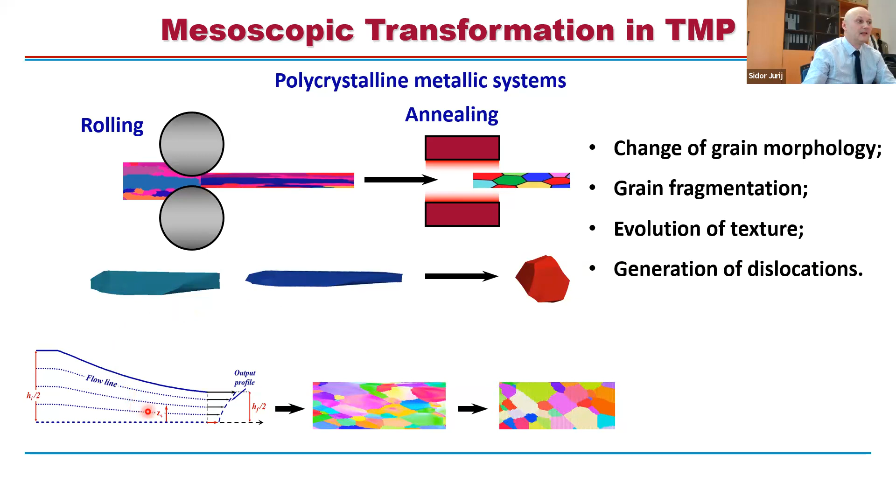Apart from this, you have the evolution of crystallographic texture. So it's not a coincidence that I put different colors here on these grains. These colors might represent various crystallographic orientations. And during the deformation process, you have generation of dislocations. You can study all these deformation phenomena experimentally, and also by employing various numerical techniques.

So in order to understand the evolution of the microstructure during the deformation, first of all, we have to understand the flow of the material. Very often we refer to well-established techniques such as the finite element model. It's based on continuum mechanics, and then we have a continuum which deforms, which moves. For instance, we can assume that here is a rolling gap, right?

Okay, so in rolling, what happens in the rolling gap? We reduce the thickness of our initial material and we build up strain inside the material. Apart from this, you have strain path change during the whole deformation process because it's not homogeneous at all. Then strain heterogeneity across the thickness due to shear. The surface layer is subjected to shear, so you will have shear but also normal components. Therefore, the strain distribution will be very

heterogeneous across the thickness. Also, roll gap geometry plays a very important role. We can take into account friction conditions during the modeling and self-evidently the properties of our material. One single drawback of finite element modeling is the model setup and calculation time. They are time consuming. Setting up the model depends on your skill and the type of model used, but it might take 3-4 hours up to half a day or even more. And the calculation time depends on the precision you want at the end.

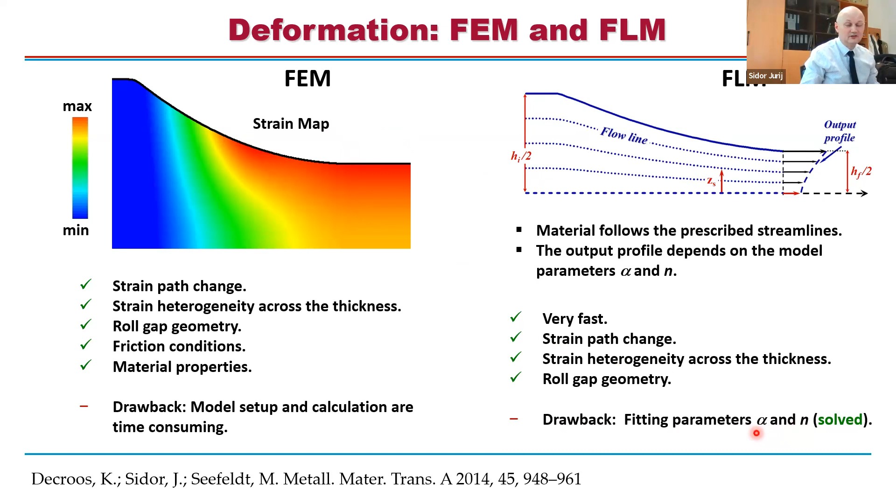In the model which we developed almost a decade ago, there are 2 fitting parameters, and with this flow line model we can almost fully reproduce the finite element results. However, there was still a question of how to interpret these 2 fitting parameters. And finally, I managed to solve this problem a couple of years ago.

In fact, it turned out that both of them are functions of the roll gap geometry. So R is the roll diameter, or radius, mu is the friction coefficient, and epsilon is the degree of the deformation. So epsilon and R are parameters of the roll gap geometry, and mu is a friction coefficient.

Here you can see the results, for instance, of the 30% deformation. If you have an initial grid, which is rectangular, so vertical lines, after the 30% deformation you have deviation from this vertical behavior due to the shear. As you can see, the same result could be nicely reproduced with the flow line model. This one takes a couple of hours, this one takes a fraction of a second, 0.2 or 0.3 seconds.

We did this exercise for many roll gap geometries, not only this one, for different thickness reductions, different roll diameters. And as you can see, we could nicely reproduce almost all finite element results. So once you have knowledge of the deformation, the amount of deformation and how it is distributed inside the material, you can move to the next stage.

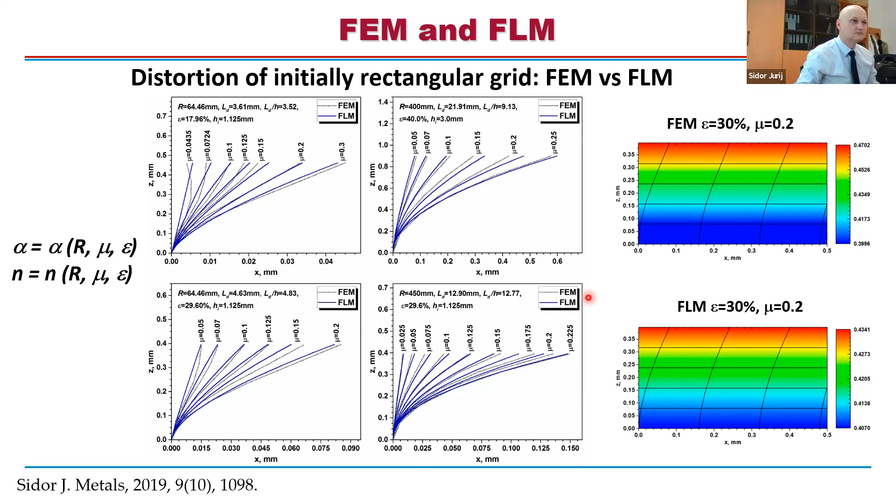The next stage is how to assess the amount of dislocations. When you deform the material, something is going on inside the material, and this something is the generation of linear defects, which we call dislocations. Here you can see the EBSD of 1050 aluminum alloy, a technically pure aluminum alloy, subjected to 50% thickness reduction, and all those features are created by the movement of dislocations. We observe deformation bands, deformation cells.

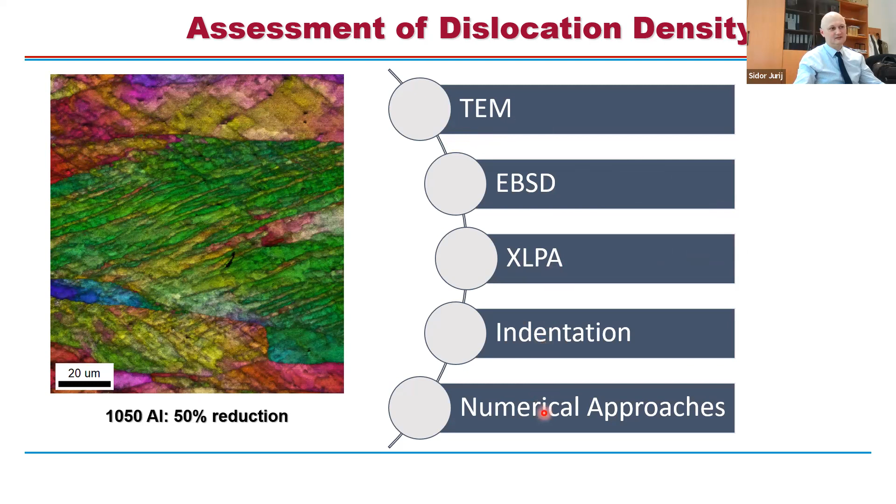Normally the evolution of dislocations is investigated by transmission electron microscopy, electron backscatter diffraction, X-ray line profile analysis, indentation techniques, or numerical approaches. TEM is quite time-consuming, and the equipment is quite complex, so very often people try to avoid it if possible. In my talk, I will concentrate on EBSD, X-ray line profile analysis, indentation, and other numerical approaches.

Regarding X-ray line profile analysis, various groups developed techniques to assess the evolution of dislocations in various materials by analyzing broadening of the line. If you observe, for instance, the 311 line, compared with the virgin material, after a certain degree of reduction this line gets broader and broader.

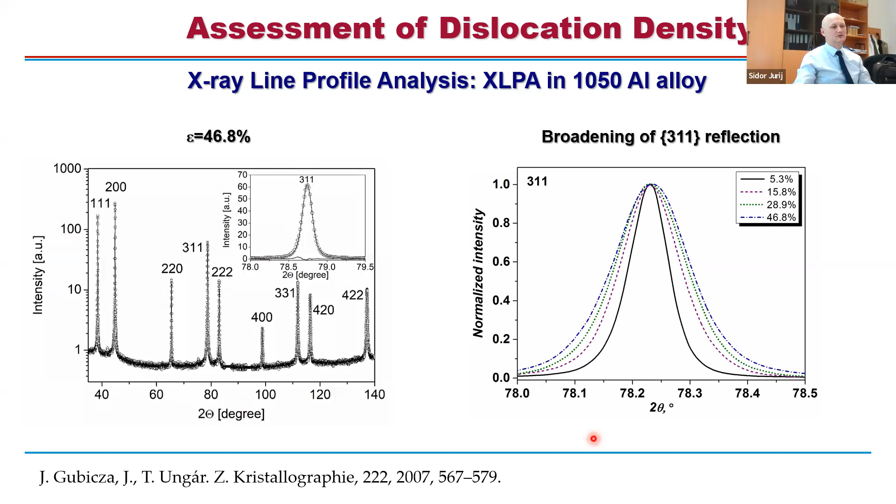The group of Tamás Ungár in Budapest, who started this assessment a long time ago, developed a method to estimate the evolution of dislocation density. You do an X-ray measurement, compare those lines with the virgin one, and based on this you can predict the amount of dislocations which have evolved. From the X-ray line profile analysis, with increasing rolling reduction the amount of dislocations tends to increase, to the power of 10 to 14. This is the range we typically expect in deformed materials subjected to 40, 50 or higher straining levels.

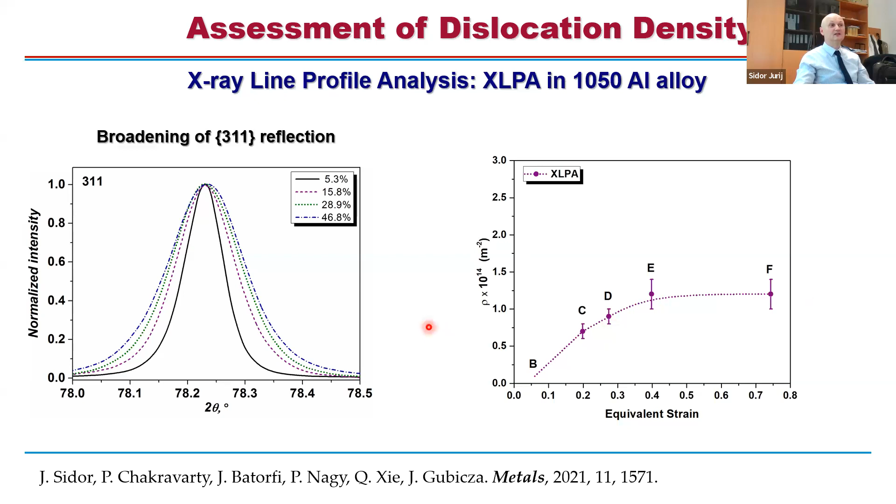Then the question is to what extent these results are reliable. We compared with the results of other researchers and have seen very comparable results. Then we said, let's try to estimate dislocation density by other techniques, and one of them is indentation. When you do micro hardness measurement, you can do it with different loads, typically from 10 gram force up to 2 kilogram force.

When you do this, you have to be aware of the so-called indentation size effect, where the hardness, in the present case Vickers hardness, is overestimated at lower loads. So when you have the information about the hardness, you always select data from the saturation zone in order to avoid this overestimation.

The group of Tony Rollett and other groups developed a technique to estimate the stored energy based on the Vickers hardness. They proposed this simple formula where you need to know the Taylor factor, G, the shear modulus, and alpha, a geometric constant. Typically people assume this geometric constant is 0.5.

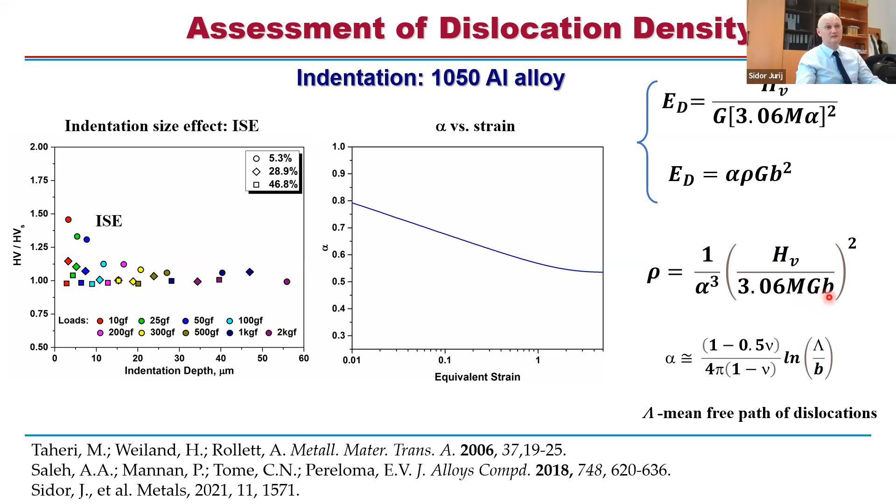Then we compare the results, what we got from the indentation technique and X-ray line profile analysis. And in fact, we were quite amazed that the trend was very, very similar. And also the order of magnitude was identical. There will be always some differences between techniques, which is evident, right?

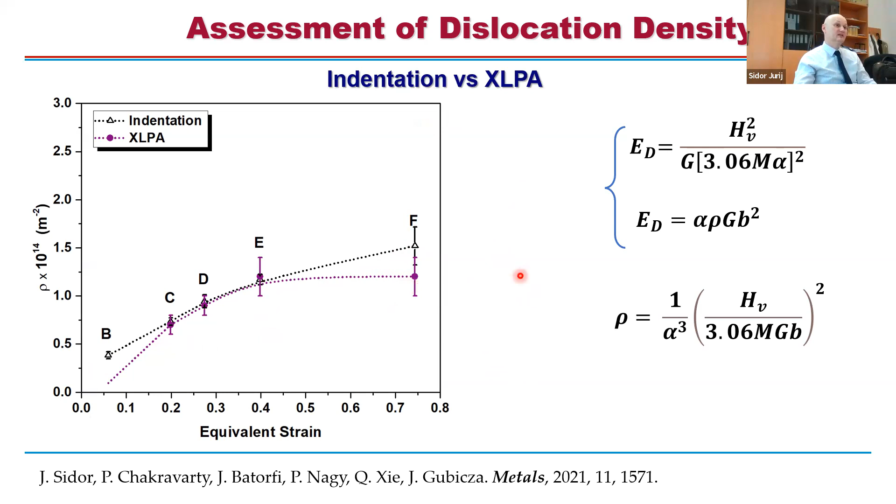So we published this work recently about the evolution of dislocations in the 1050 aluminum alloy subjected to different straining levels. And apart from this, we wanted to know whether it's possible to catch it numerically. So in fact, the total dislocation density can be modeled by the original Kubin-Estrin model or a modified version of this model, which is actually an analytical solution.

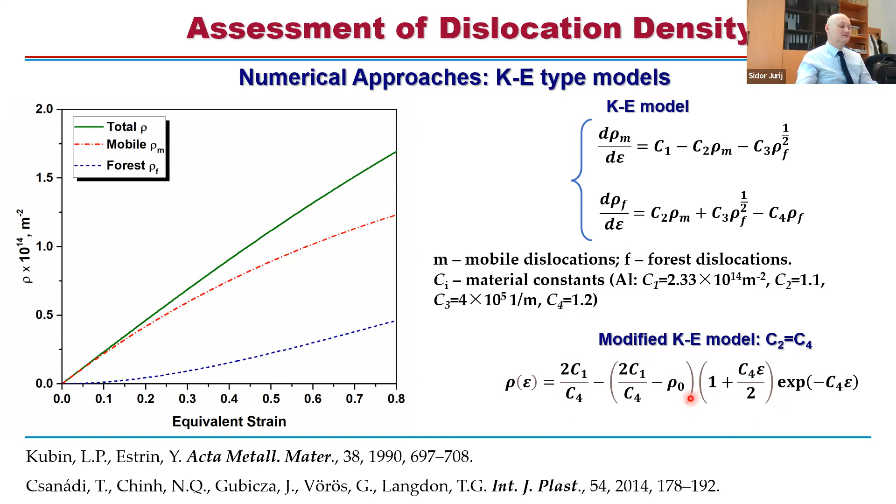In the modified model, basically what people observed is that the C2 and C4 parameters are almost identical for the majority of materials. And if you assume that they are identical, you can find an analytical solution, which you can see here. Then you can directly calculate the total dislocation density in different materials, depending on the amount of strain.

So here are the results of the modeling. The Kubin-Estrin model and modified Kubin-Estrin model are basically the same. And our experimental points, which were measured by hardness measurements, show a really very good correlation between the model and experimentally observed data. We published this result recently in Materials Characterization. So in fact, you can predict the evolution of dislocations by having information about the amount of strain which develops during the rolling.

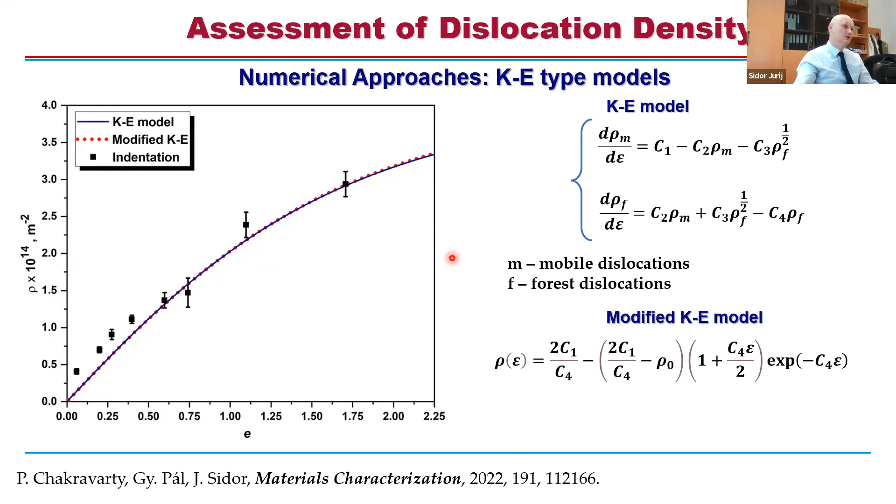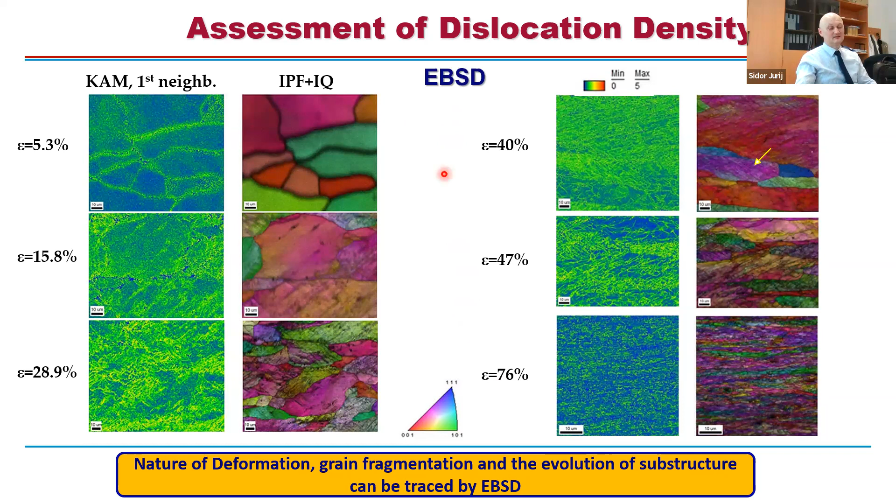When you calculate the kernel average misorientation, there is a way to calculate the amount of geometrically necessary dislocations. So you have two types of dislocations: geometrically necessary dislocations and statistically stored dislocations, like immobile ones. And GNDs are basically produced by the gradients which are observed inside particular grains, right?

When you calculate the kernel average misorientation, one thing you will immediately see is that if you perform a measurement with a certain step size, the GND you calculate will strongly depend on the step size and the neighbor you choose, first neighbor, second neighbor, and so on. So here we put the dependence of the GND on the so-called kernel radius, which is either step size or neighbor.

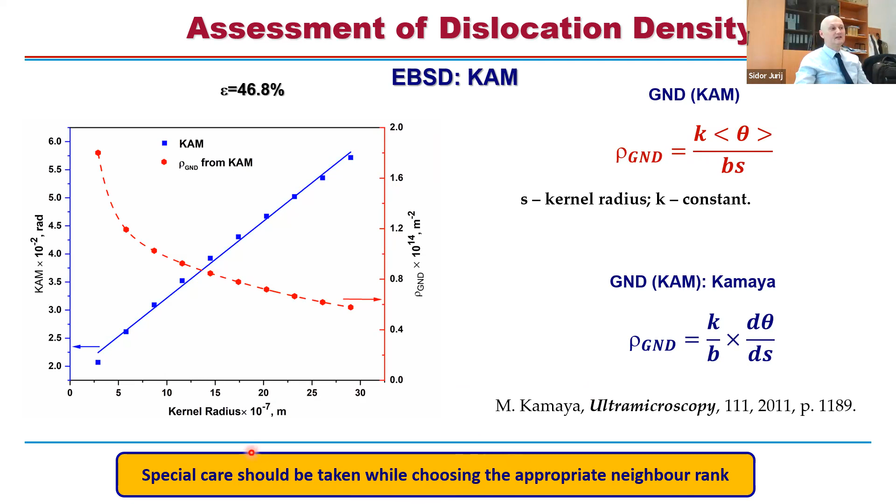In order to overcome this problem, Kamaya published a work in Ultramicroscopy, and what was shown is that instead of putting some average misorientation here, you put the slope dθ/ds, which is normally a straight line. And if you put this slope, you get a more reliable answer about the geometrically necessary dislocations. So special care should be taken while choosing the appropriate neighbor rank or kernel radius.

When you have too small step size, then you will run into another type of problem, which is called noise. So you will have overestimation of GND density. In fact, this problem was observed almost 2 decades ago and published by David Field and co-authors. What they show is that, in fact, you have overestimation or noise at very small step sizes and underestimation at large step sizes. And then the question is, what should be the appropriate step size?

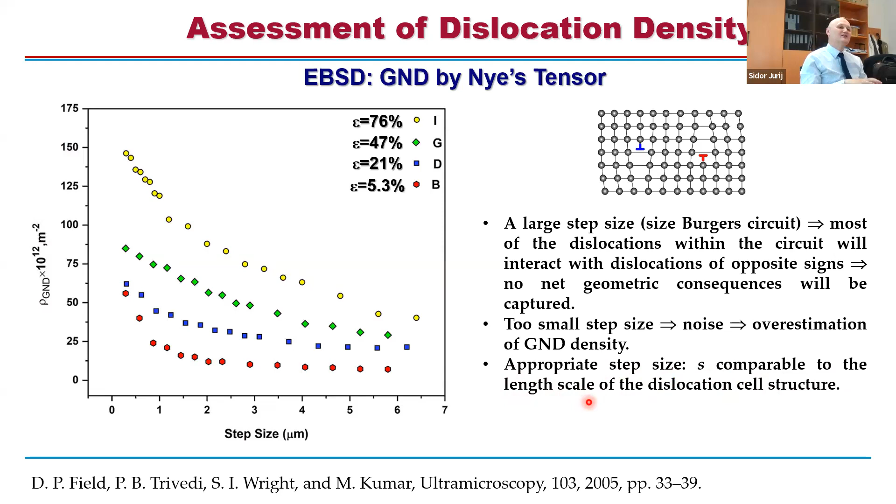So the appropriate step size should be comparable to the length scale of the dislocation cell structure, right? And then the question is, how can we estimate the size of the cell structure? When you look at what I call classical works, it's the work of Gil Sevillano and co-authors, published in 1980, where they summarize the evolution of the

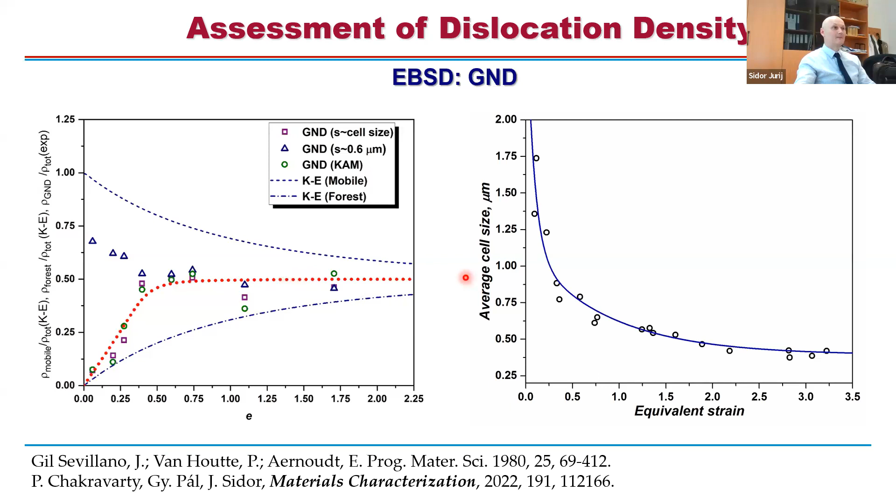And in fact, it's physically sound: the amount of GND tends to increase with the straining level. And what was very interesting to observe is that this line tends to saturate at almost 0.5, 0.48, something like that, right? So almost half of the dislocations which are generated, they are GNDs. The rest are trapped. So 50% will be trapped, and we call them statistically stored dislocations. So here you have also from the model, mobile dislocations and forest dislocations. They are, I would call, upper and lower bounds.

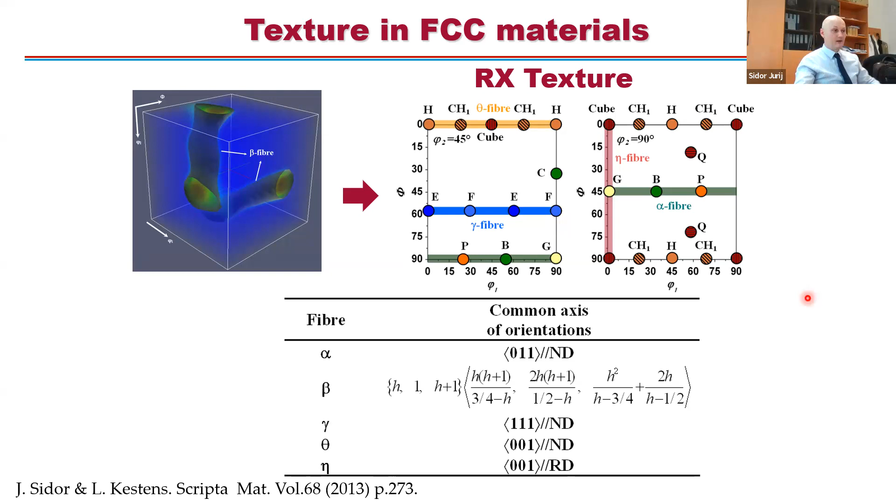Okay, then in order to understand the evolution of crystallographic texture, we developed a model which allows us to predict the evolution of crystallographic texture during recrystallization based on the deformation texture. If you remember, at the beginning I told that we should have very good knowledge about the deformed structure. So in fact, when you model the recrystallization texture, you should have very good knowledge about the deformed state.

So we take the deformation texture, then we apply growth and nucleation operators on this texture. The growth operator in our case is micro growth selection. We assign high mobility to 111 40 degree oriented grains with respect to the deformed structure, right? And then we apply so-called orientation selection or nucleation operator, which implies that you employ low stored energy nucleation. So only those nuclei with the lowest possible energy will grow. In fact, physically, it's sound because the system tries to reduce its stored energy, and only those nuclei will grow which

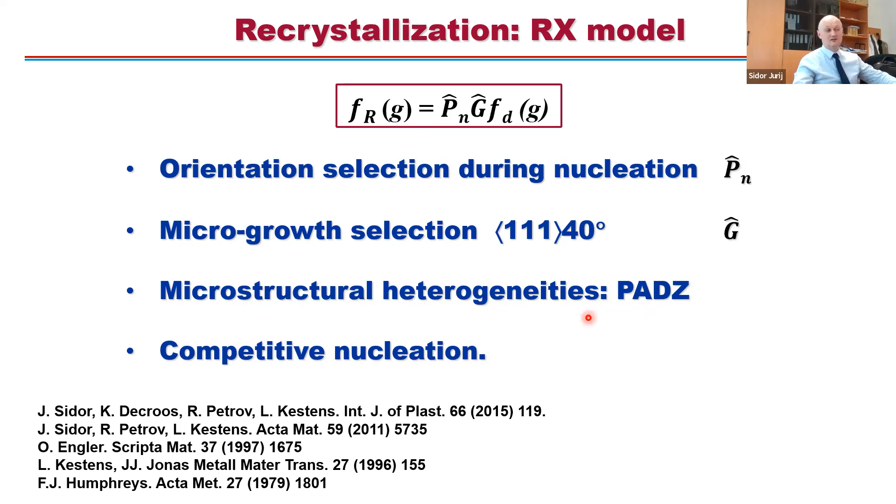have lowest possible energy. So the results of this work were published in a couple of journals, in IJP, Acta Materialia, and so on. And our model was based on the previous models, which were developed by Engler, also the work of Kestens and Jonas. And regarding particles, we took the knowledge from the group of Humphreys. So when you have particles, then you have a particle affected deformation zone, and then you have PSN, particle stimulated nucleation, which in fact competes with the bulk nucleation.

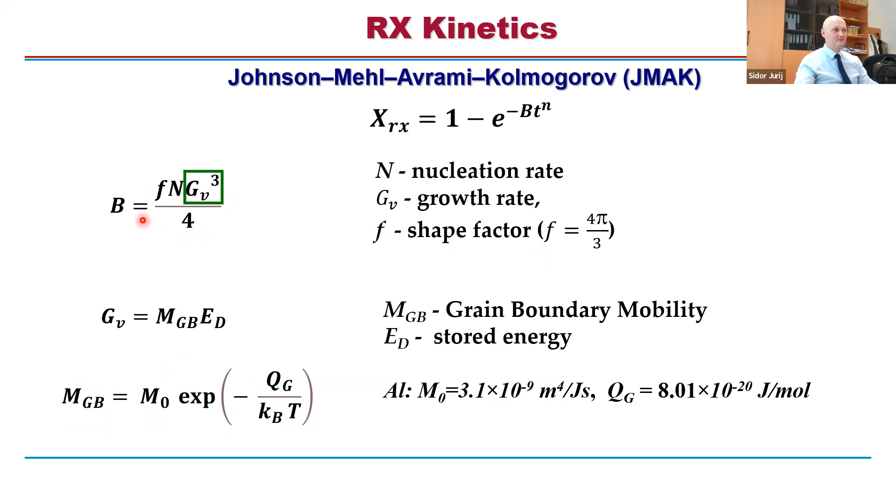Then I came back to our recrystallization model, which we developed more than a decade ago, right? So I started to analyze the outputs of our recrystallization model. So if you have a deformed matrix, assuming represented by 2000 crystals, so deformation texture, then in the model we calculate so-called growth potential texture. So we generate potential nuclei, right? So we have 8 variants; instead of 2000 crystals we will have immediately 16,000 crystals, so 8 potential nuclei per deformed grain.

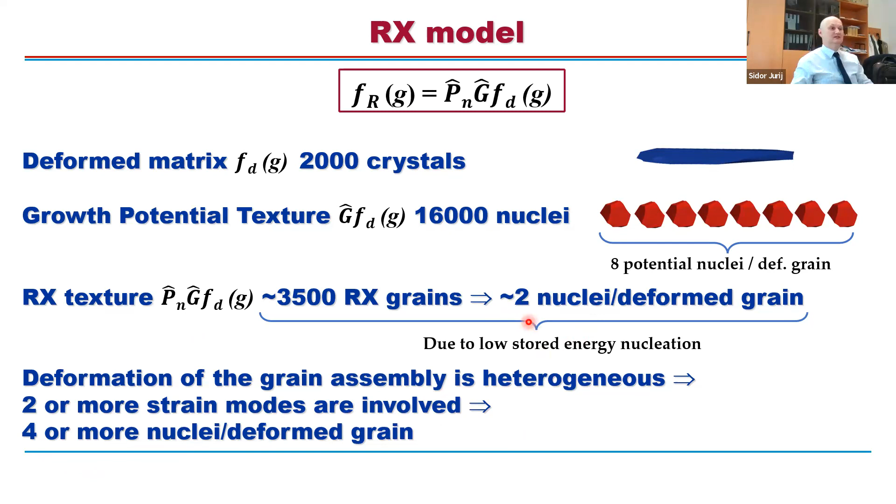However, the deformation of the grain assembly is heterogeneous, so you have not only one strain mode internally, you have always more, especially if you have particle-affected deformation. So then you have at least another 3 strain modes. If you have deformation bands or shear bands or whatever, then even the most homogeneous macroscopic strain mode will internally be accommodated completely differently. So instead of one strain mode, you will have more. So sometimes you might have 4 or more nuclei, so you have to double or even triple the amount of nuclei due to these different strain modes. Okay, so on average, I say that one grain might produce approximately 5 nuclei.

What you can also do, you can calculate the incubation period for the recrystallization. So it depends on the gamma surface energy. There is stored energy, C is a constant, about 2.5. Then radius of the nuclei, which is also constant, approximately 2.5 micrometers. Then mobility, you know, stored energy, you know. So it's strain and temperature dependent, but I calculated for our cases, it was between 0.5 and 2 seconds for high temperatures like 500 centigrade or even higher.

So if you have an initial grain with the average grain size of 27 micrometer, I calculated the volume, so the volume of initial grain and deformed will be identical, and then assume that this grain will produce 5 nuclei within this period, 0.5 or up to 2 seconds. Then I get nucleation rate. I put all these parameters here, right? So then I get nucleation of 10 to the power 14, 10 to the power 15, right? So N0, I calculate back. If I know the N, I can estimate the N0.

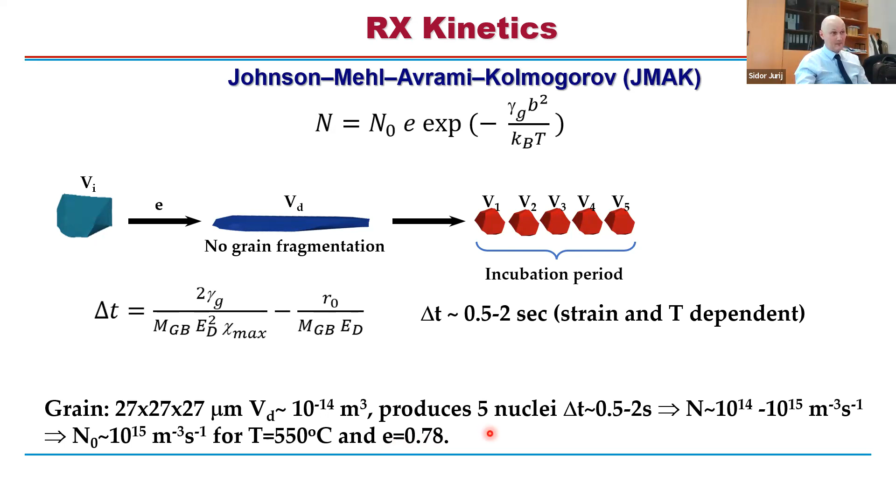And it turned out that in fact, N0 is approximately 10 to the power 15 for 550 centigrade and strain e equals 0.78. In fact, we have checked literature sources which are claiming that one grain can produce 3-4 nuclei. So I based my assumption on this. Good. So at least we have order of magnitude for N0. Then another parameter which we still do not know is n, the Avrami constant. And this is the most difficult parameter to estimate, because the rest you can calculate somehow. And for this one, for the time being, there is no way.

In the original JMAK analysis, it assumed that we have nuclei which are randomly distributed. For this case, n is equal to 4. However, you never have this random nucleation. So N constant, the G-dot constant, however, you hardly observe this. You observe it for small strains and also fine-grained materials, then it might be true, but for the rest of the cases, it's not. Normally, what scientists claim is that n is between 3 and 4 when the nucleation rate is time dependent, and in fact N tends to drop during the recrystallization process with time, right? So then in this analysis, n tends to vary between 3 and 4.

Normally, when N drops fast, all nucleation events occur at the beginning of recrystallization, and these kinetics can be described with n which is close to 3. That's what we know from various literature sources. Then grains are constrained by microstructural constraints. So when the grain can go in one direction or 2 directions, for instance, you have columnar grains, or when it grows only in 2 directions, right? It will also deviate from this ideal case, it won't be 4. So the question is which one to choose.

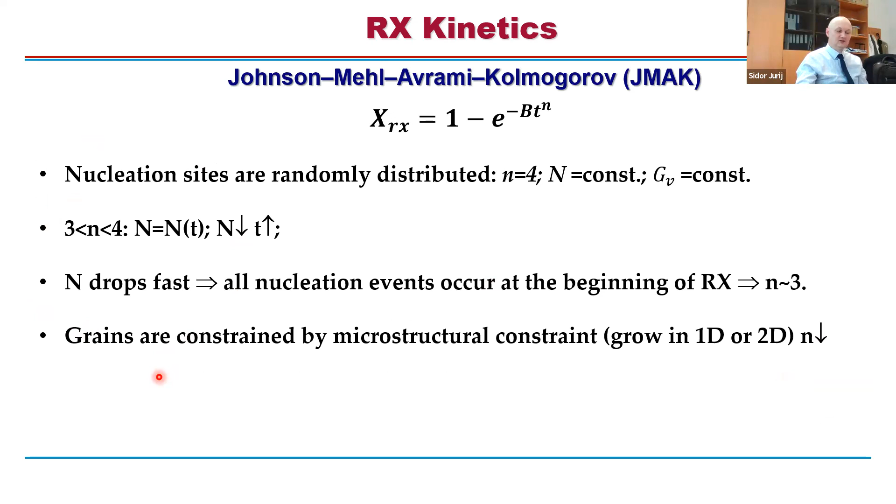Those are, I would say, earlier investigations in the 60s, 70s. Then a later investigation, the group of Stefan Zaefferer and co-authors, they published a paper in 2001 in Acta Materialia where they investigated iron-nickel alloy with the grain size of 10 micrometer. And then it turned out that n is very close to 1, or was varying between 1 and 1.5.

Then a group of Sellars, basically in the 1980s, claimed that n is not constant and tends to drop during the recrystallization process. Davies and Hutchinson in 1989 claimed that in fact in fine-grained copper and coarse-grained copper, n was varying. So for the same material, identical conditions. The only thing that was different is that once they worked with fine-grained material, in the other case coarse-grained material. So this n seems to be sensitive to microstructural features.

Very similar work was done again by a group of Sellars in the late 70s and 80s in stainless steels. In more fine-grained materials, they observed n equal to 2, and when the grain size increased, in coarse-grained material, n was equal to 1. So in fact, there are more questions than answers.

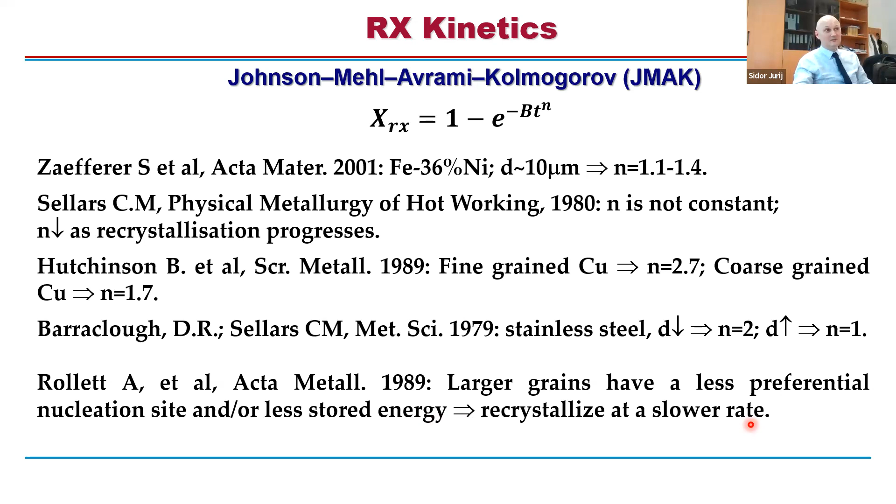And then Tony Rollett and co-authors did simulations of JMAK theory. What they claim is that larger grains have less preferential nucleation sites and/or less stored energy, and then they recrystallize at a lower rate compared to finer grains. However, we also have to take into account that very coarse microstructures tend to develop shear bands. There is also a famous paper of Davies and Hutchinson. And if you have shear bands, the whole recrystallization kinetics will speed up. For the time being, we leave this n parameter as a fitting parameter in the model.

In our investigation we worked with 1050 alloy because it's technically pure aluminum. We wanted to work with an idealized system. So 350 centigrade recrystallization after various straining levels, 36%, 46%, and 54% thickness reduction by rolling. We calculated our experimental data, and then we set N0, which was fixed for all cases. If you remember, I told you the approximate value was 10 to the power of 15. In our case the ideal parameter was 2.87 times 10 to the power of 15. And then we managed to reproduce this kinetics with n equal to 2.5. That was one model parameter.

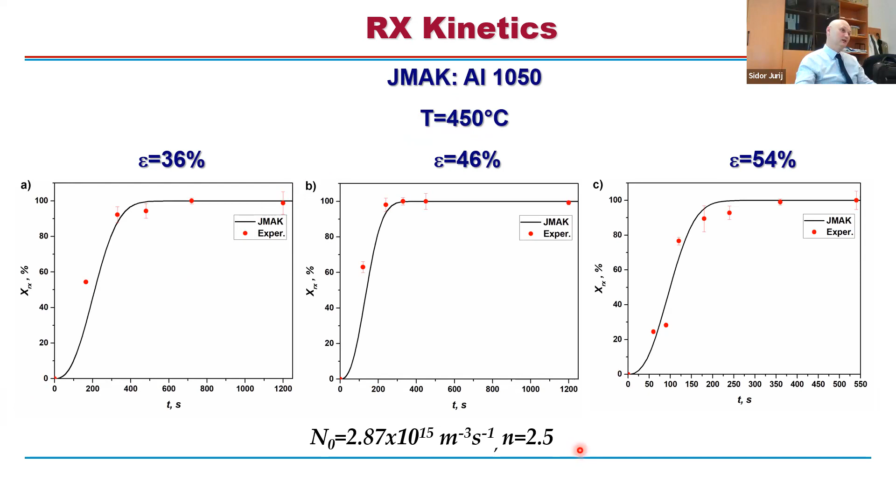Then we go further. The same condition, but recrystallization occurred at 450. Still, we were able to nicely reproduce the kinetics of recrystallization, and we were quite happy to see this. It seemed that we can nicely model all parameters, calculate them, and do reliable prediction until the moment when we performed annealing at 550 centigrade. Then at small thickness reduction it worked perfectly. However, at larger thickness reductions like 44 and 55%, n tends to drop to 2.2, 1.95, which means the whole recrystallization is more sluggish compared to other cases.

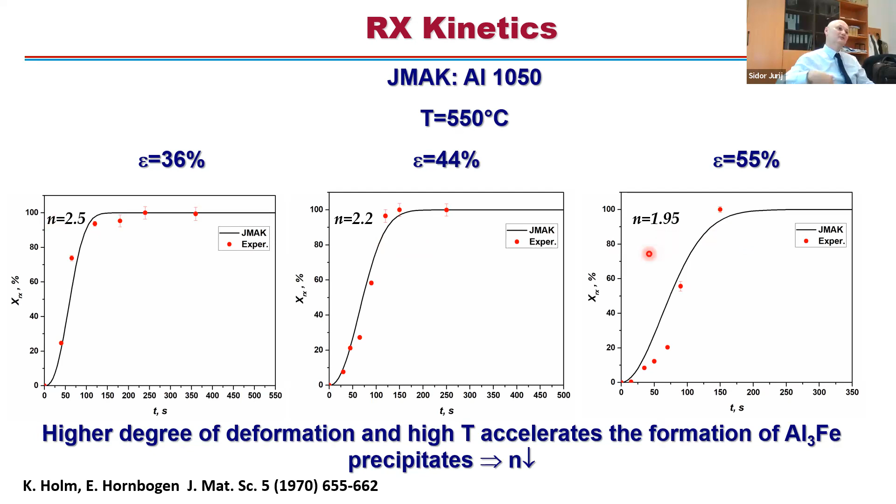And then we analyzed again earlier papers from the 70s, work of Holm and Hornbogen. What they claim is that a higher degree of deformation and high temperature accelerate the formation of aluminum-iron particles in similar systems. They did a lot of TEM work, and therefore n tends to drop. When you have higher straining levels, the formation of precipitates is more likely, and these precipitates will slow down the recrystallization, therefore n tends to drop. So you have to take into account all these microstructural features.

Summarizing my presentation, I would like to say that the evolution of dislocation density during cold rolling can be traced either by X-ray line profile analysis or micro indentation. Both provide comparable values, as you have seen. However, indentation tends to overestimate the quantity of dislocations at very low deformation levels. Then you can also simulate the evolution of dislocation density by numerical approaches like the Kubin-Estrin model or similar approaches. There is also a very similar model of Frederic Barlat, published in International Journal of Plasticity, as far as I remember.

When you calculate the GND from EBSD, you have to be aware of the kernel radius. The step size of the scan should be comparable to the size of the substructure which evolves during the deformation. And then based on these quantities, you can basically discriminate between statistically stored dislocations and geometrically necessary dislocations.

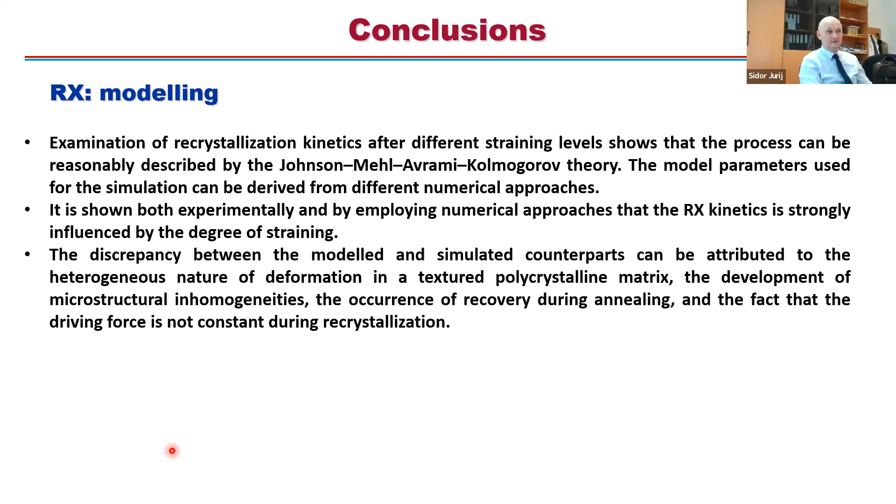Regarding recrystallization modeling, we have seen that many parameters can be derived. If you know dislocation density, you can calculate the stored energy and the mobility. If you know the mobility, then you know the growth rate. The nucleation rate seems to be working okay now, more or less you can guess. The problem is still the Avrami exponent, which seems to be a complex function of many microstructural features.